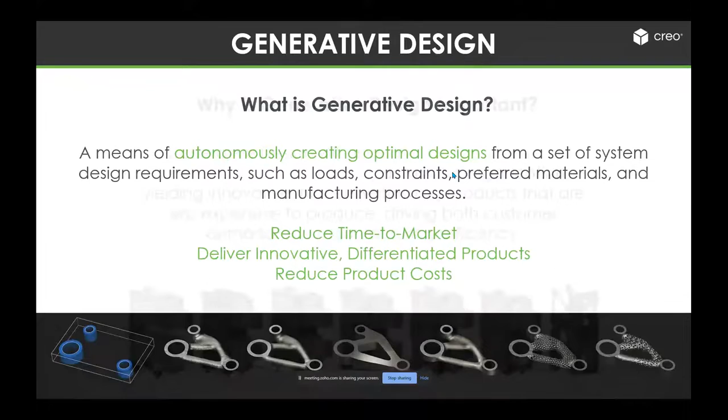With the introduction of Creo 7.0, we have introduced a new topology optimization extension inside Creo 7.0. Creo generative topology optimization automates the design of innovative products based on functional objectives, constraints, loads, and manufacturing processes. The result is a design optimized for efficiency and manufacturability in a way that a human designer could never easily produce using the traditional process.

Some of the core advantages in the topology extension would be ease of use, fast optimization setup, powerful optimization technology, result verification and integration, semi-automatic CAD reconstruction, and interactive and parametric behavior. The last option is where Creo is unique compared to the competition, because with this functionality users can go back to the parametric model, make any design change, and the topology extension automatically modifies the generated design without having to recreate all of the processes. As far as I understand, there is no other software that offers this core functionality.

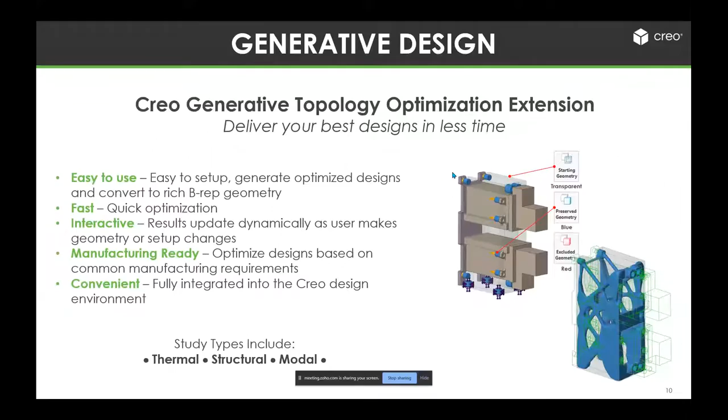The next major enhancement introduced inside Creo is called real-time simulation. Creo real-time simulation is powered by Ansys, who are leaders in the simulation industry.

Imagine a case scenario wherein a user would always like to create the best product he can. But with traditional methods of creating products and then sending them to manufacturing, users often have to iterate the design with minimal feedback from the simulation. There is no direct connection between the design and the simulation. So typically what happens is that once the user designs a product, they send it back to the simulation team, who make modifications inside the constraints and advise the designer to make changes so it can meet the objective. This is an iterative process that goes back and forth, and it results in a lot of productivity issues because there is no direct way for users to understand the implications of a design change.

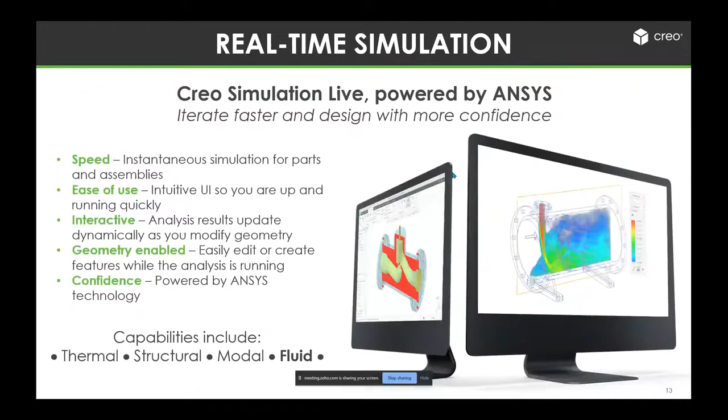Imagine if you have a CAD tool that can provide you with real-time feedback on the design decisions users make. Imagine how fast and more effective it would be to iterate and meet design goals, bringing great products to market faster. Creo simulation makes this available.

Significant changes have been introduced in Creo simulation live for flow analysis. In Creo 7.0, fluid flow analysis inside Creo comes with the Creo Simulation Live extension. The software gives you instant flow simulation capabilities, directly integrated within the Creo environment. Specifically for engineers, the software's ease of use means they no longer need to have CFD expert knowledge to run the simulation.

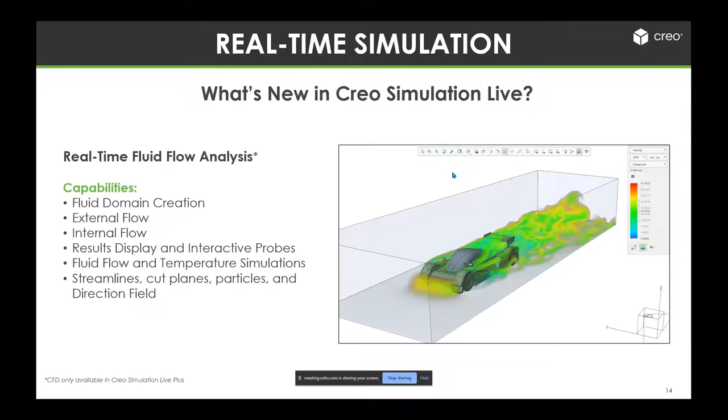As users and designers change the geometry, the analysis gets automatically and dynamically updated. Creo Live is fast, intuitive, and powerful. In addition, Creo 7.0 also has significant improvements to Creo Simulation Live. Workflow and UI improvements help users of the product and increase productivity for customers. Improvements to the engine make results easier to interpret. Additionally, we can now also conduct transient and thermal studies with the software, giving more insight into the real performance of the product.

The next major enhancement introduced in Creo 7.0 is multibody design. Multibody design was a request that was pending long from customers, because there were advantages users would have. With the introduction of multibody design, users can implement advantages in all areas, including generative design, additive manufacturing, and simulation-driven design. So what exactly is multibody design? With multibody design, the software allows you to separately manage, visualize, and design geometric volumes.

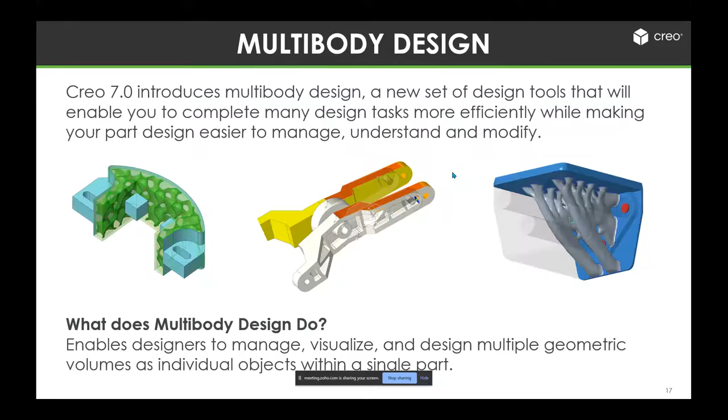This new workflow leads to more efficient and flexible part design and a better user experience. Multibody design is particularly useful for generative design, additive manufacturing, and simulation-driven designs. Some of the advantages of multibody design are that it makes products faster and easier to design, improves workflows, increases visualization and usability while customers have multibody options available, and provides flexibility to develop more efficient and flexible part designs.

For generative design, multibody is immensely useful. For example, with the addition of multibody design, users can separately designate starting geometry and exclude geometry from the study when they don't want the geometry to be considered. Users can manage the resulting bodies in different types, such as generative or BREP. With all this flexibility, there's an innovation that's possible.

In terms of additive manufacturing, multibody again helps users change the print color and material for specific geometry, giving them greater flexibility to design the optimal product. In terms of simulation, multibody helps users perform best under real conditions. Multibody design allows users to use multibody for simulation processes, which is particularly useful for analyzing fluid cavities using CFD dynamics.

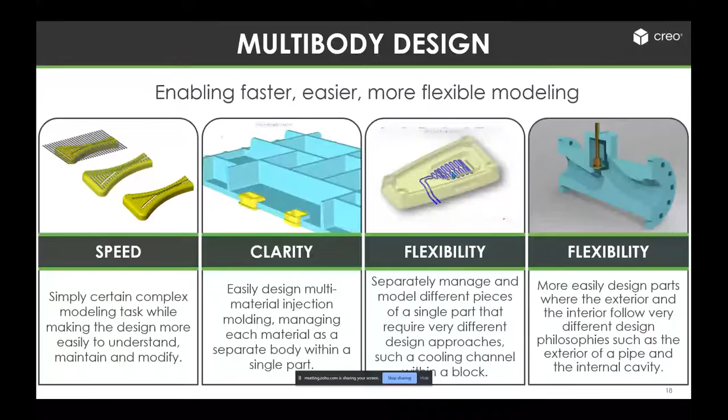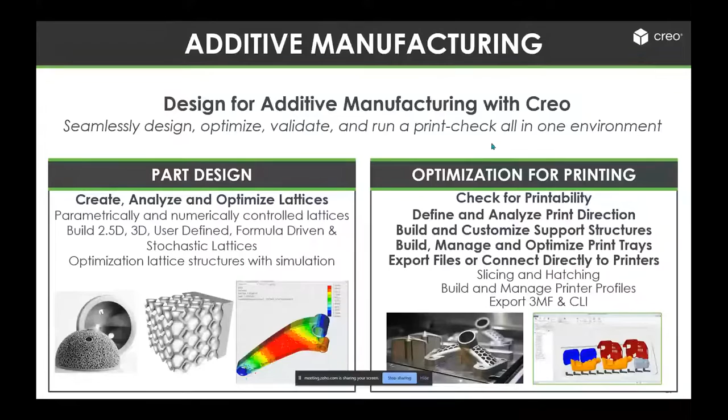As Kuldeep discussed, the objective of my presentation will be to showcase the technical capabilities, or the new enhancements, in Creo 7.

One of the major enhancements that Creo has come up with is the multi-body approach to product design. As part of this multi-body capability, we will see how we can create complex grooves in a plastic handle using pattern geometry of a body.

First of all, in the interface, you can see that in the model tab there is a body group which has been added that allows you to deal with multiple bodies within any part geometry.

As part of this exercise, I want to create a basic tool body, then pattern it using a simple pattern option, and then subtract that geometry. So we'll go for the front plane, I'll click extrude, and switch to the normal orientation.

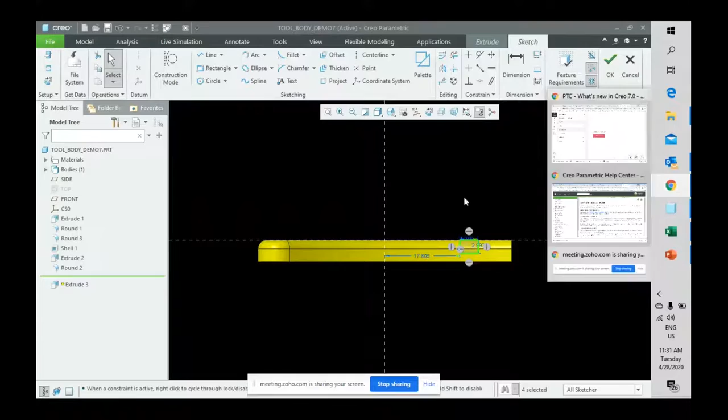Basically, I want to create complex grooves in this plastic handle using multi-body techniques. You can see in the interface that you now have a group called body, which contains commands for operations on multiple bodies if they are available in a part geometry. Also, on the left hand side in the model tree, there is a category called bodies, and currently there is only one body in this component.

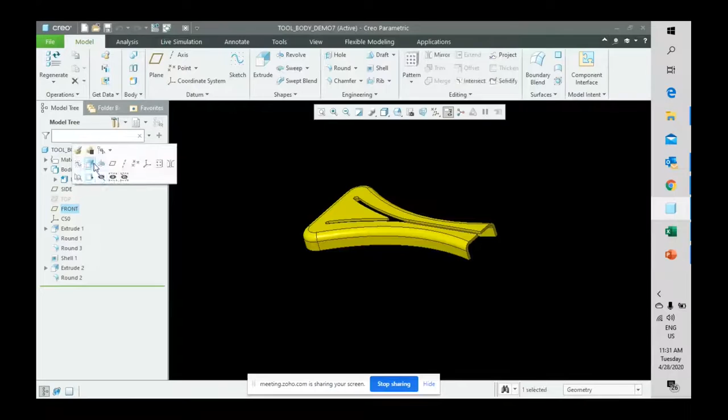So now I will create the tool body that will be used to manipulate this geometry. I'll go for the front plane, create extrude, click to orient the view parallel to the screen, and then go for a simple rectangle.

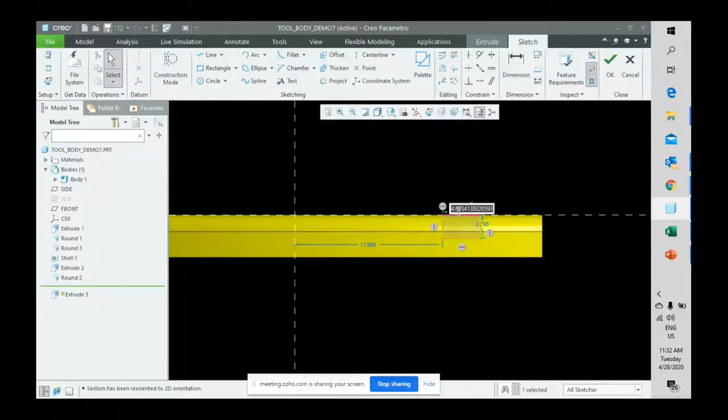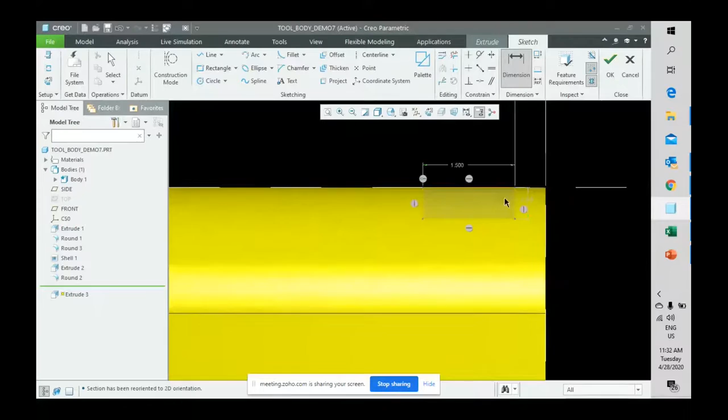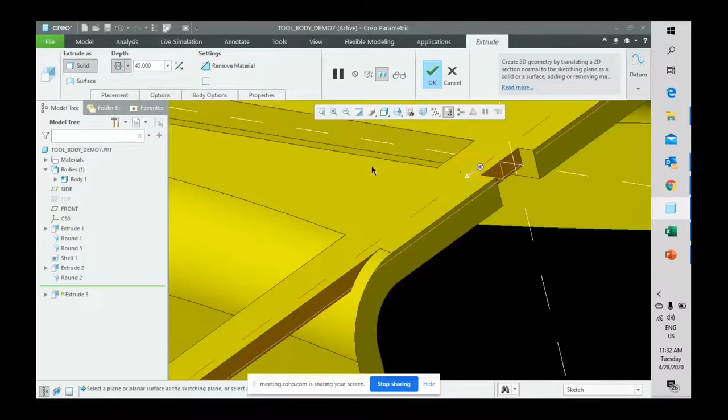I will dimension as per the design intent. So I'll set this to 1.5, this to 0.5, and create one more dimension between this object and this one, which will be 0.5. I'll set the depth as a symmetric depth, give it a value of 45, and currently it's merging with the original feature, which was the default option.

But now, as part of the multi-body approach, there is an additional tab available for base features like extrude. So if we go to the body options tab, we now have the option of creating it as a new body. I'll select new body and hit OK.

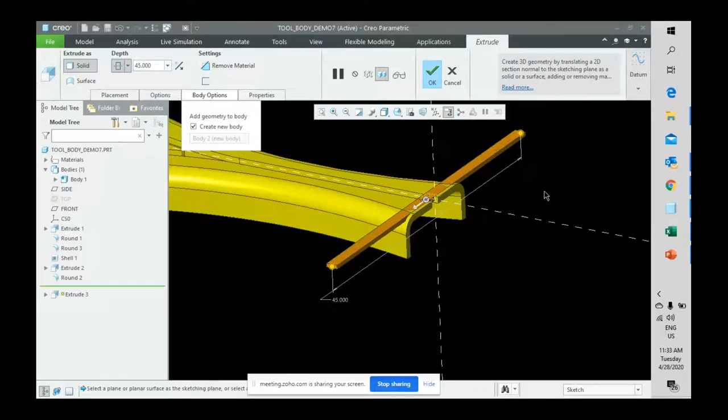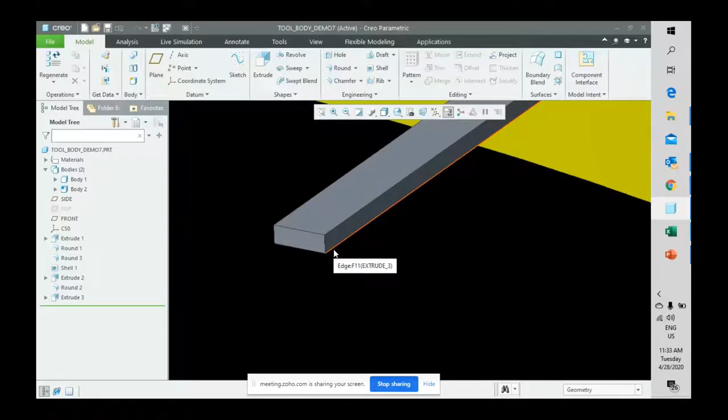Now we can perform some specific operations on this newly activated body. You can see in the model tree that body 2 is now the active body in this part. I can go for some local operations on this body - I'll select this edge, click chamfer, make it 0.3, and also control-select the other edge.

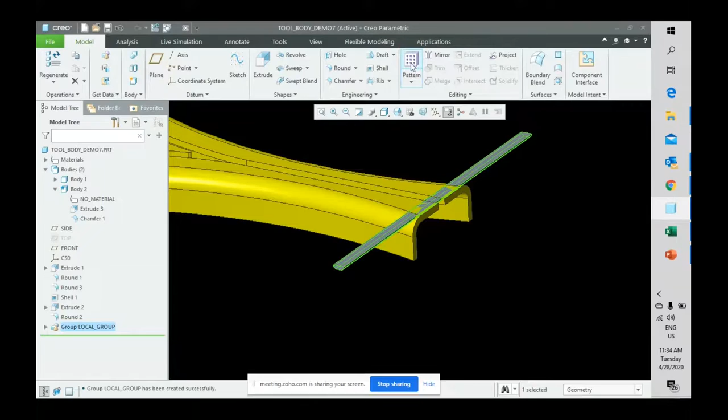Now I will create a group of these two features so that I can pattern it. I'll go for group from the mini toolbar, and then utilize the pattern option, a simple dimension pattern. I'll select this one and set it to 2.5, with 27 as the number of copies.

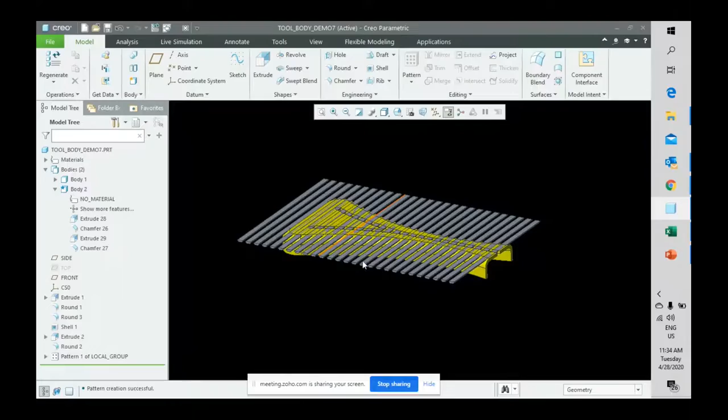So now you have a pattern. I'll create one more feature so that it will remove the unwanted portion of the bodies that will be required for the eventual Boolean operation.

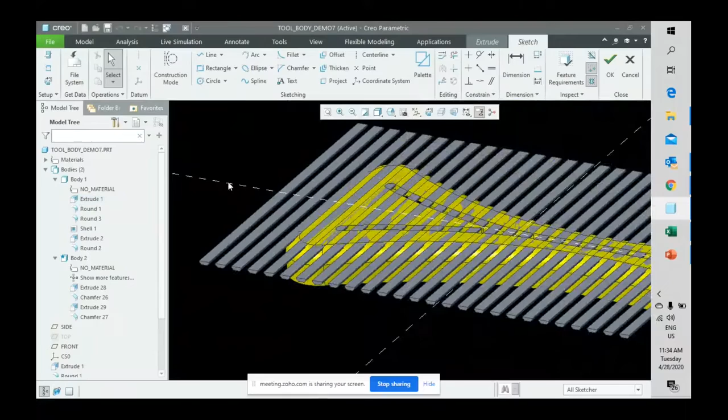I'll go for the top face of body 1, go for extrude. I can utilize the offset project edge option with the loop option. Select the surface once again. So the offset is in the wrong direction. I'll enter minus with the number so that it is offset in the right direction. And then I'll hit close, hit OK.

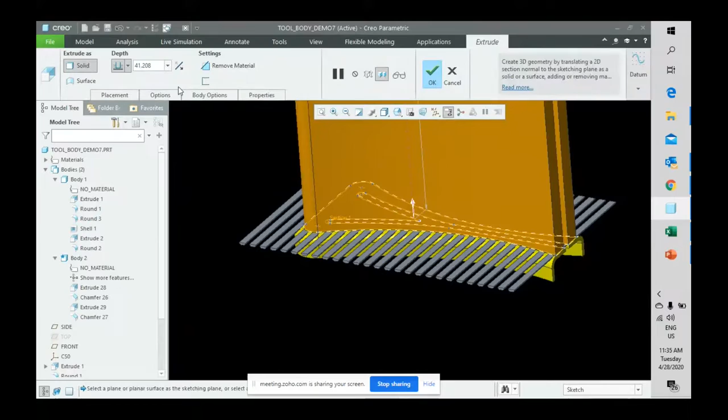I want to go for remove material, so I'll go for flip and also activate the remove material option. And I can go for a certain depth. I can also go for flipping. So now it ensures that whatever material is retained is the one that I want to eventually cut from the yellow body. I'll hit OK.

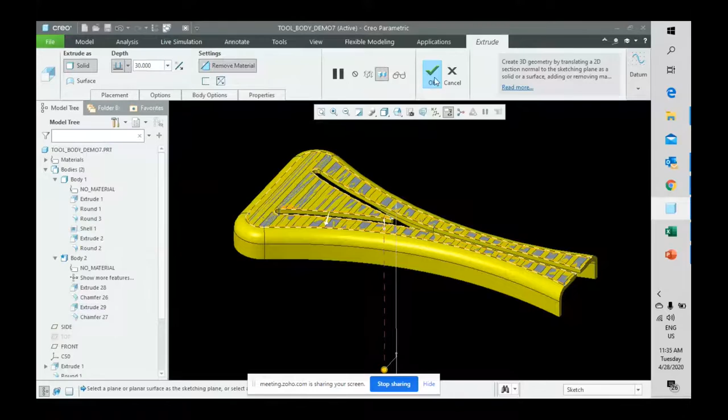So now there are two bodies, and you can see that there are certain operations which are automatically associated with those bodies. As the features get created here, those features get associated automatically with the respective bodies.

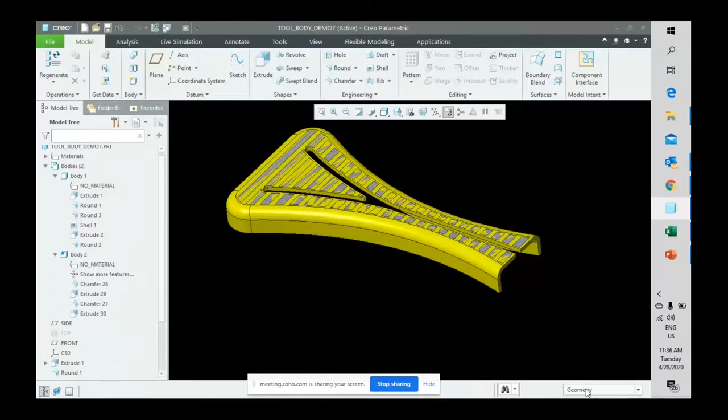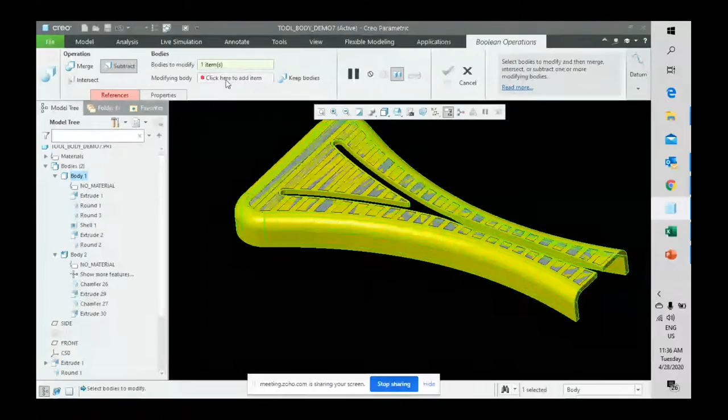So now I can set the geometry filter to bodies. I can go for selecting the body, or I can go for the merge option, Boolean operations option, select subtract option, select the yellow body to be modified, and the modifying body to be the pattern of the tool bodies. And you get the final result that you were looking for.

Such complex operations were also possible earlier with Creo, but you had to use a lot of surface modeling techniques to get this geometry. So now with the multi-body approach, it offers a more flexible, more efficient workflow to get this geometry.

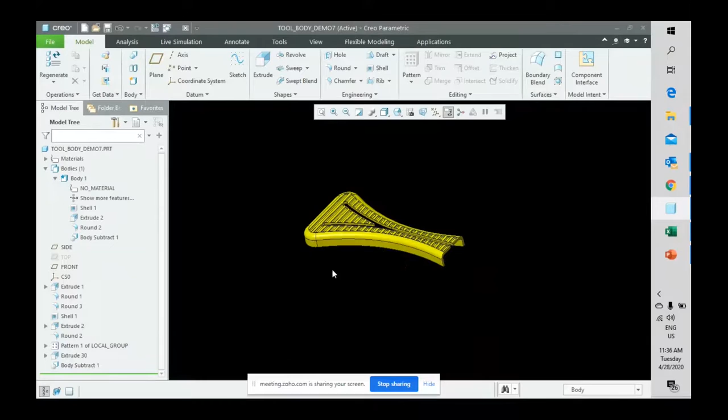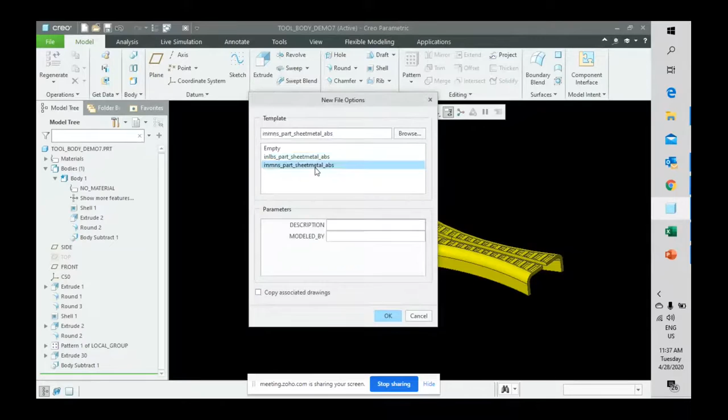All right. I will also want to show some enhancements in sheet metal. So if I go to sheet metal, there is a quick enhancement in the form of how forms are treated in the flattened state.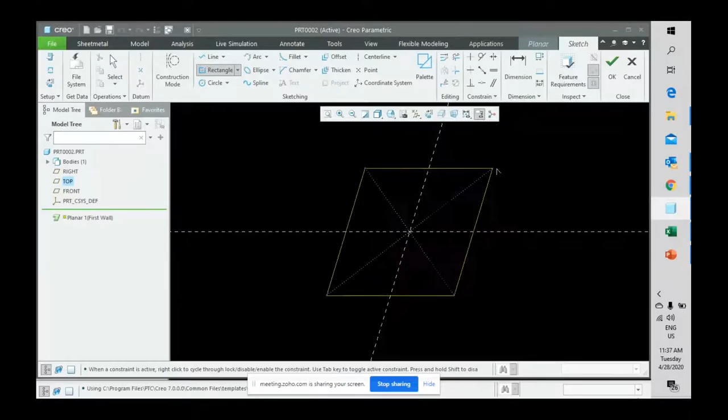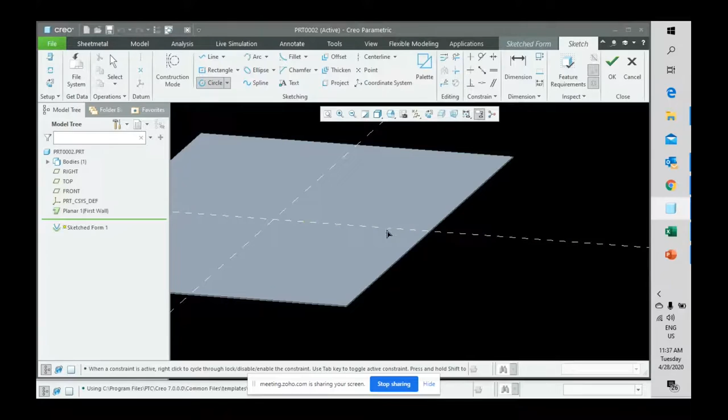I'll create a simple planar sheet metal geometry. I'll give it a specific thickness. And now I will go for a form option in the form of a sketched form. I'll select the top face. I will sketch something like a circle. I'll select OK. I will extrude the depth. I'll go for some fillets on the placement edges. I'll also add some taper.

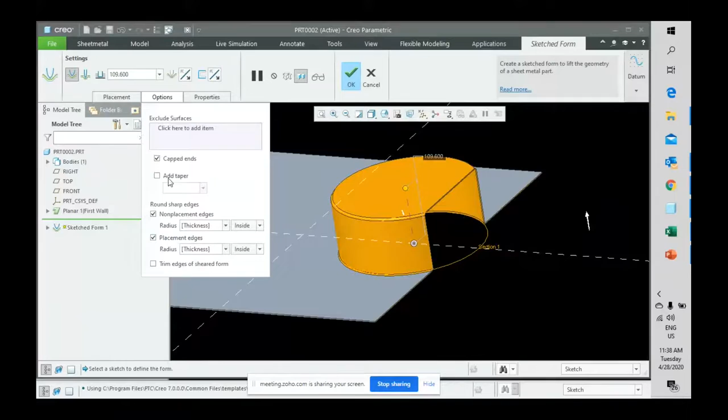Now you can see that there is some deformation here. So if you go to the flat state, if I preview the flat state, you can see that there is some unwanted deformation here, which can prove very difficult in the manufacturing stage.

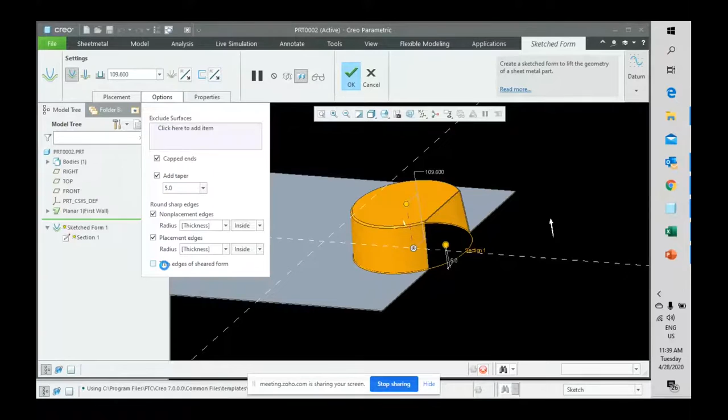All right, so now we can get rid of this deformation by simply redefining the form. And under options now we have an extra option of trimming the edges. So as soon as you go for trim edges, you can see that the deformation is gone. And if you now preview the flattened state, you get a nice clean edge that is suitable for manufacturing.

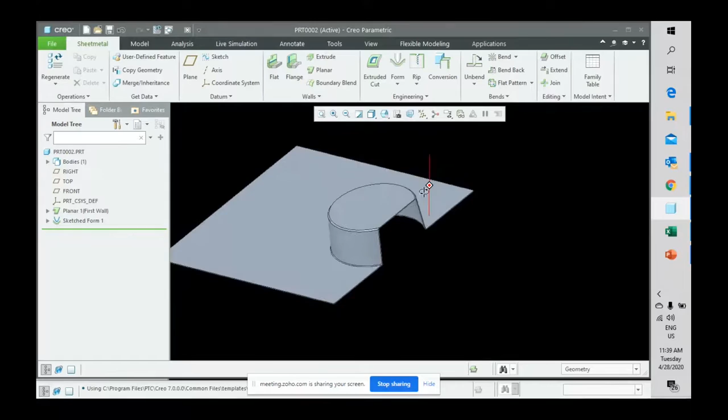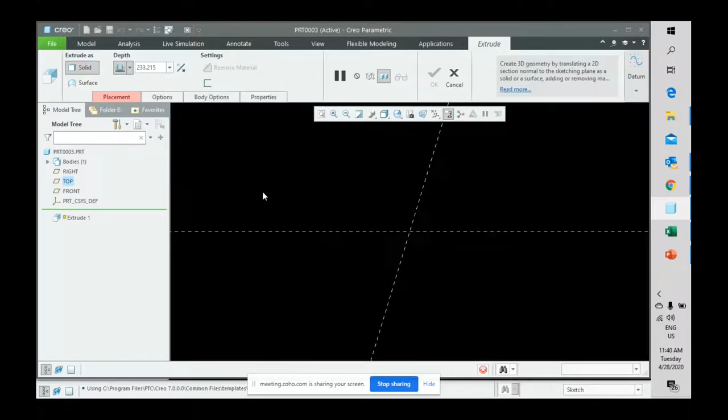Okay, so a nice enhancement there. For the draft, the enhancement is supposed to be on imported geometry, but it also acts on existing Creo geometry. So I'll create a simple block and I'll go for draft.

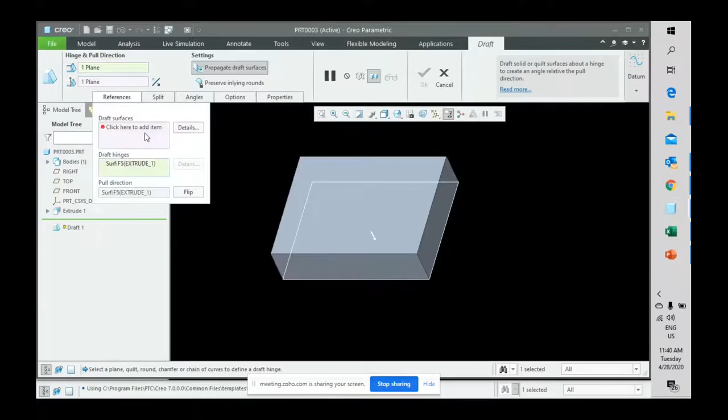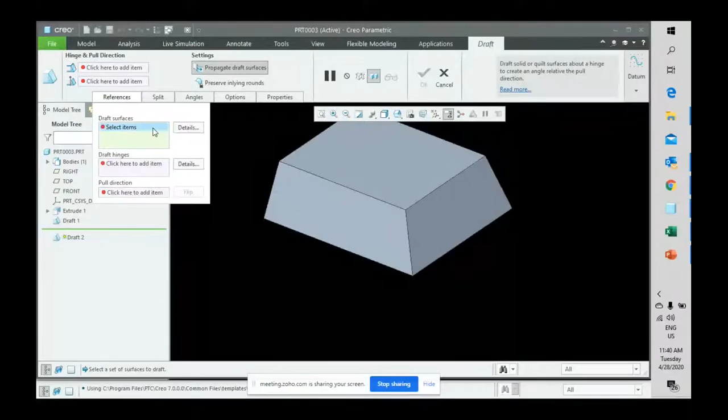So now you see that these surfaces are already drafted, right? So if I now go for draft, and if I select the same surface once again, you have the ability to redraft the same set of surfaces, which was not possible earlier. Plus, you can change the draft angle as well.

So this is another good enhancement, which works very well on imported geometry as well as on native Creo geometry.

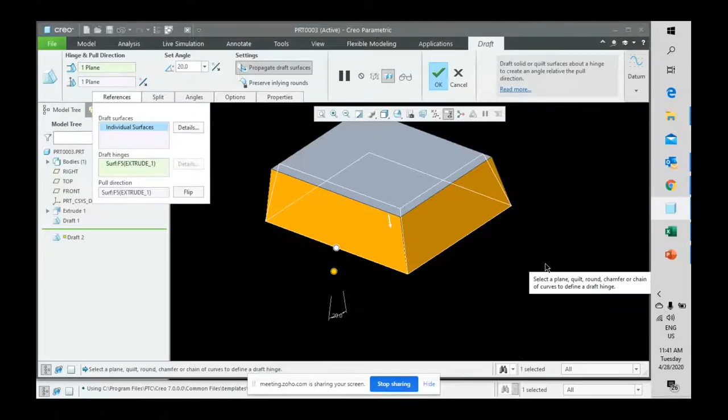So there are multiple enhancements, and for the sake of time, we cannot cover each and every enhancement. But there are similar advantages of multi-body across the entire product development process, be it live simulation, fluid flow simulation, generative design, or topology optimization, as well as in additive manufacturing, which Kuldeep has already stressed upon.

I would like to draw attention to certain other benefits available under Creo licensing if you are under subscription, namely home use licenses and license borrowing.

So basically, Creo home use licenses are available to every user who is under active subscription. With every license, say if you go for a standalone license, you get one home use license. But if you go for a floating license or a concurrent license, you get two home use licenses. Okay, so home use licenses show up in a customer's install base and are obtained the exact same way as the commercial license, either through the web tools or via license management.

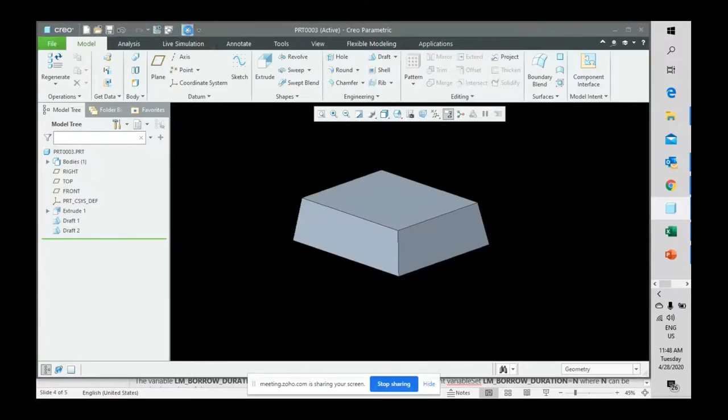I'll close my existing Creo sessions.

So this is in general the procedure for borrowing. You can also, if you want to return the borrowed license early, do that using a certain environment variable called PRO_ALLOW_EARLY_RETURN.

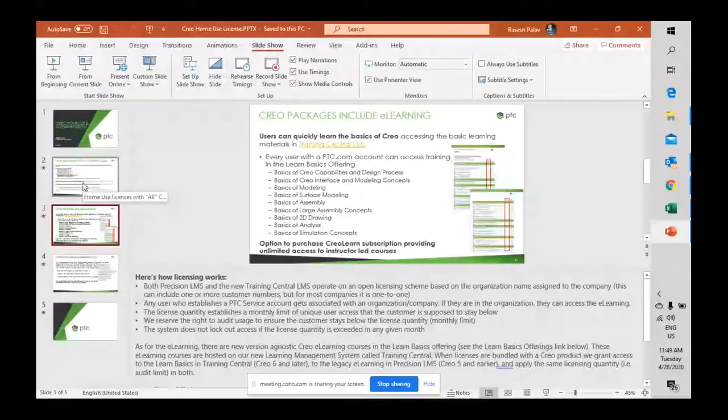So this is something that I wanted to show as part of the presentation. For users who prefer or have been asked to work from home, these are the options that PTC provides in the form of home use licenses and license borrowing.

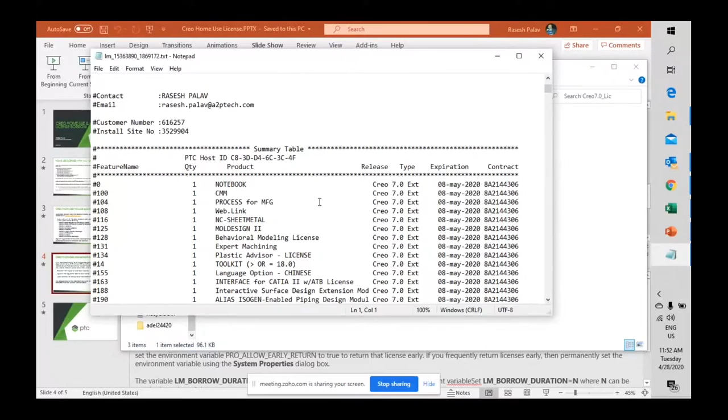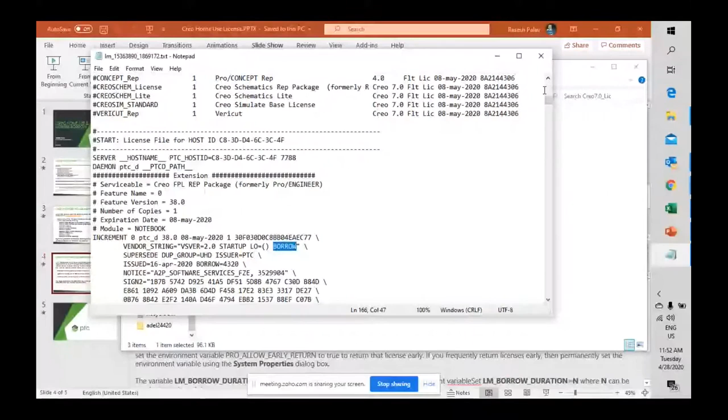I can show the borrow license file which has a keyword called borrow. Whenever PTC issues license files, you get two license files: one standard with the keyword standard, and one without the standard keyword. The borrowable license file is the one without the standard keyword. If you open this file and search for the word borrow, you'll find that this license file has the keyword borrow. So you need to use this license file for configuring the FlexNet license manager.